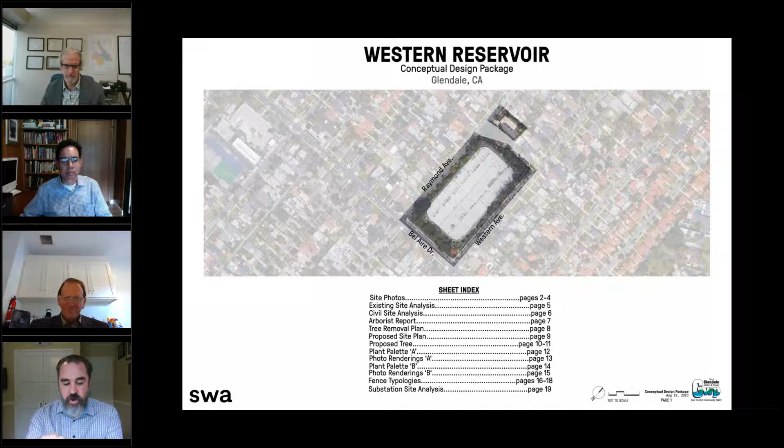So for a quick rundown of the site, we don't necessarily have to spend a lot of time on these site photos—most people are very familiar with it. But you'll notice there's rewilding landscape, as Michael mentioned. When the irrigation was cut off, the landscape went to seed, and it's become a densely overgrown hillside. We all know the chain link fence is not in very good shape. We're looking at different photos of the landscape overgrowing, plant debris—you can see what the hillside looks like. So that's really what we're coming in to renovate, everything you see on this hillside.

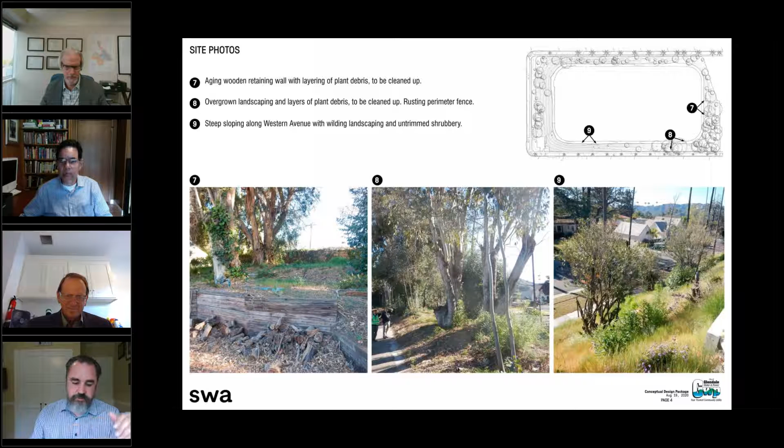As we came on board as landscape architects, we started doing a site analysis. We looked at the existing retaining walls, the access road, the lifeless streetscape planting, the chain link perimeter fencing, and we started looking at what areas were most in need of renovation, removal, or refurbishment. There were also a lot of interesting heritage large trees on the site, which lends into our arborist report and analysis that you'll see in a bit.

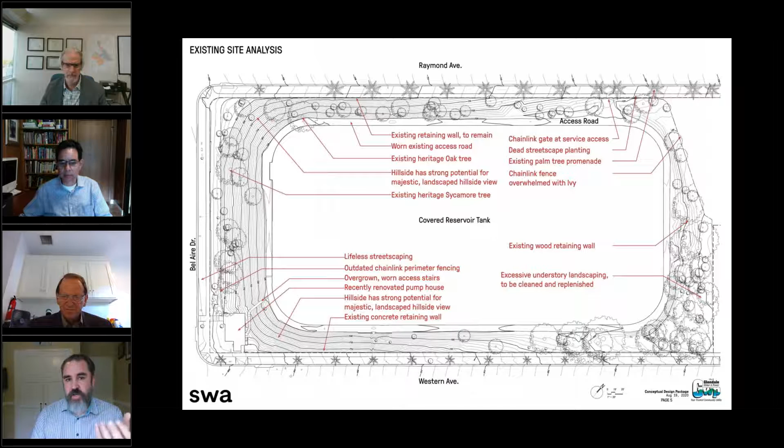Not only did we as landscape architects look through the site, we also brought our civil engineers on board. They started looking at slope retaining, the condition of the roadway, the condition of retaining walls, and the condition of the large trees and roots affecting certain areas. Of course, with the heritage oaks, we want to make sure we maintain those as best we can. So it's really all hands on deck, wanting to make sure this is not just going to be a blow-and-go change of the landscape, but something that's able to last for quite some time.

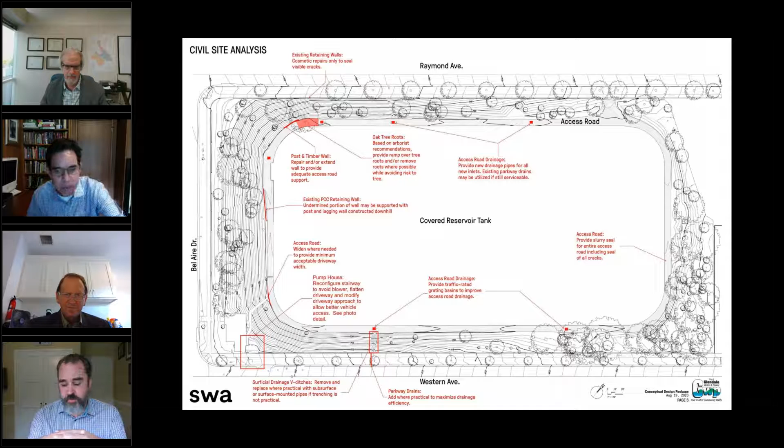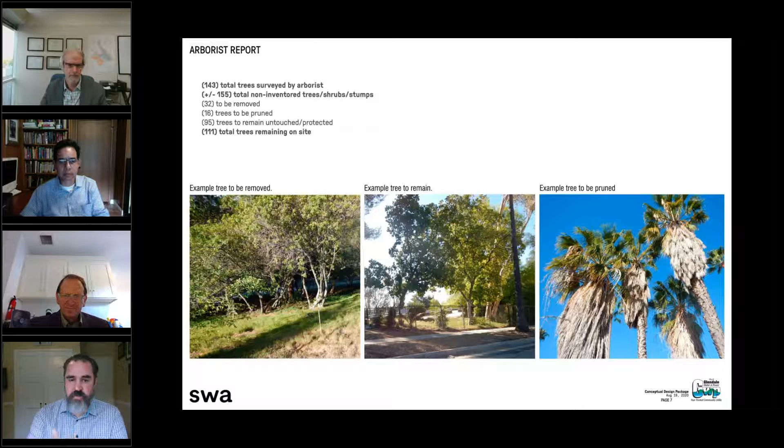To that note, we also brought in arborists, who spent a few days out there in April of this year. They surveyed over 143 trees, and there were around 155 non-inventory trees, shrubs, or stumps—smaller species that are most likely going to be removed, especially the stumps, or at least ground down. Of those 143 trees, we looked at example trees to be removed, trees we'd like to remain, and trees we'd like to be pruned. Coming through that, there were only 32 trees that we really felt were not in good health or should most likely be removed for design, aesthetic, health, and vigor reasons, while 111 of those trees would remain on site. Now, of course, you're going to ask me, what does that look like?

There's a large massing of trees on the northern edge, and sporadically different trees elsewhere. Walking the site with the arborist and Gerald, we realized it's really an eclectic menagerie of different species. Part of what we're looking at is that some species being removed are either non-native or invasive, as well as species that are overgrown or unhealthy and non-vigorous.

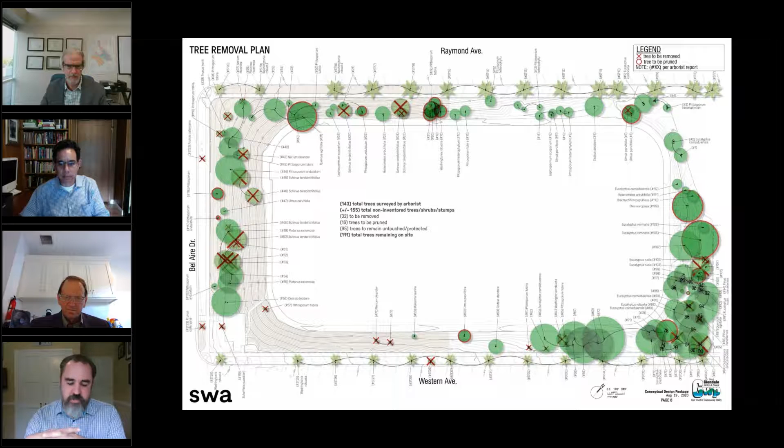We're looking for native and adaptive species that are water-wise and will adapt well. There will be irrigation systems installed, but for this type of planting, that's more of an establishment system and for periods of extreme drought. So what we're creating is an upper story of native and adaptive trees, looking at both flowering and deciduous trees as well as evergreen trees.

Species-wise, the flowering and deciduous trees we're looking at using include the California walnut, California sycamore, Western redbud, Chilopsis linearis (desert willow), as well as madrone and buckeye. These all give nice, brilliant pops of color throughout the year, and change with the seasons—everyone knows what a sycamore looks like when it turns. It's one of the pleasures of finding trees in Southern California that show the change of seasons, and that's what we're aiming for with this palette, besides being native and adaptive.

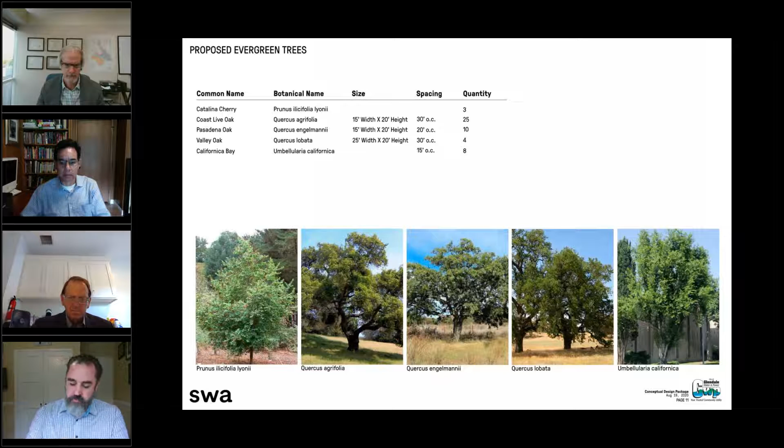The first of these two is the California hillside, hearkening towards thriving plant communities found in the local hills. We have brittlebush, California holly, deergrass, buckthorn, as well as some sages. There may be some additional plants added to this mix, but what we're looking at here is the overall theme and general idea of what it would look like—hearkening towards the thriving plant communities of the local hills.

So this is our California hillside option. As Gerald mentioned, if you have any questions throughout this, we have someone monitoring the chat—please feel free to post those and we'll address them at the end.

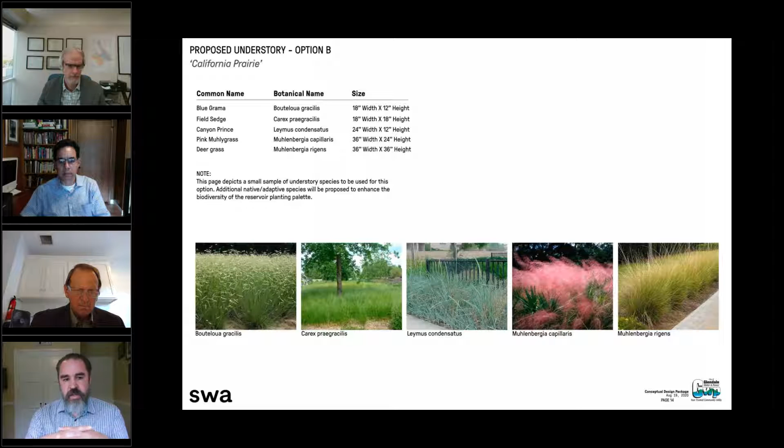Our second option is the California prairie. This is more a palette mixed of grasses that will thrive in a free-flowing, more open-space aesthetic. The rendering of that would look much more like this.

As you can see, the overstory plants and trees we're intending would be basically the same, as those are really the bones of this landscape renovation. And this understory is going to give quite much of the character to it.

So whether it's the California hillside or the California prairie, we know that this is what you're going to see from your front yards. We're really looking at increasing the curb appeal, not just of the reservoir itself, but of the neighboring streets of Raymond, Western, and Bel Aire. So we look forward to your thoughts and comments on these palettes.

The next series of options that we're presenting to the public is the fence that is going around the property, and that's what you see here. As was mentioned, we are removing the chain link fence, and you'll be looking at roughly 1,620 linear feet of new steel metal picket fence that'll be going in.

The first of three options we have to present today is a 3-rail commercial style classic. As you can see, what they mean by 3-rail is there's a bottom rail along with 2 top rails through the picket. That is our option A.

Our option B is a 2-rail, more industrial style metal picket fence. As you can see here, there's a single rail at the top and a single rail at the bottom, as opposed to 2 rails at the top.

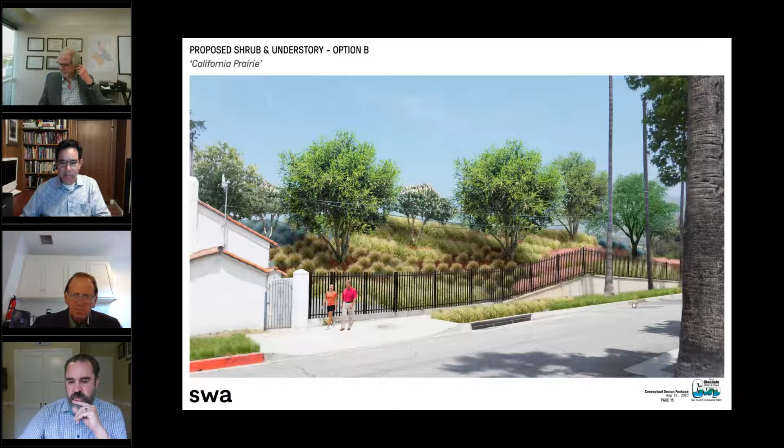Carmen, that's an excellent question, and I know my presentation went rather quickly as well, but we will be including, in between the sidewalk and the curb, which is considered the parkway area, and that area will be re-landscaped. I can actually go back up to part of this presentation where we're showing the proposed tree plan. So the median planting will also be, whatever planting that we're utilizing in the understory, that will be coming up in the medians.

And we're also proposing new trees, on Raymond Avenue in between the palm trees, to blend with what's already existing there, with oak trees in between the palms. So I hope that helps. We are also adding new trees along Bel Aire Drive in this parkway as well.

So Jeremy, there is a difference in the parkway planting between the two options. Do they match the understory for that option? Correct. The parkway will match the understory option, whichever one, whether it's the hillside or the prairie, the parkway will match with that. It'll be drawn from the same palette.

A follow-up question, since we're on the parkways, this one comes from Alex. I support tree planting in the parkway 100%. In order to be more climate resilient, we need to maximize shade in our public right-of-way. Question is, are the proposed parkway trees tall shade trees or smaller trees? This is a very popular neighborhood for walking. We should maximize shade as much as possible. Along those lines, why are there no shade trees installed on the western side of the reservoir?

That may be a question for the urban forester and how the plans were done. As of right now, the western side is staying with palm trees alone because it matches what is going on the rest of Western, maintaining that aesthetic through the whole street. On the Raymond side, we've added oak trees because oak trees have been added along Raymond as well, maintaining that aesthetic, and those are shade trees. The trees along Bel Aire are also some flowering and some shade, so there's a mix there. So we're somewhat bound by what is being set up around us and what the adjacencies are.

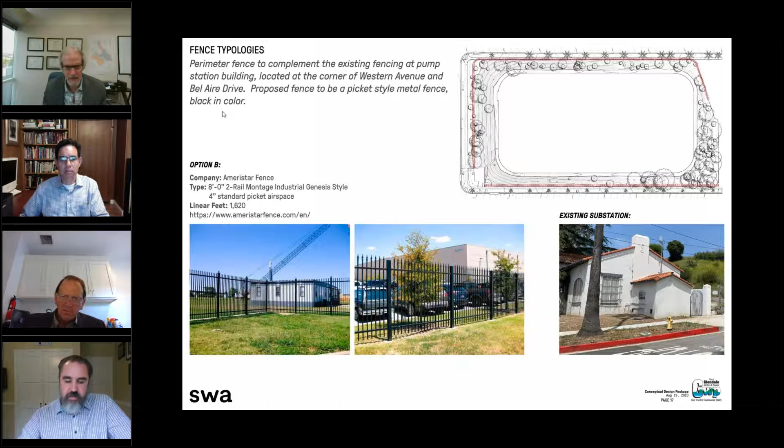I think we kind of knew this question was coming, and that is definitely an interesting comment on that. It looks like Army Barracks, and we understand.

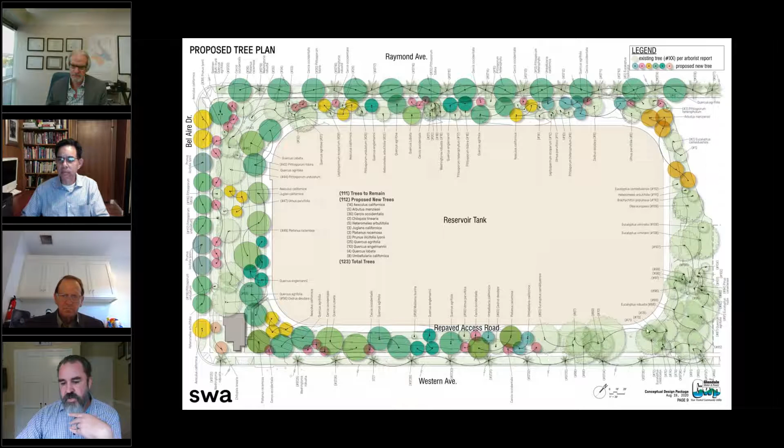The beautiful thing with the plan we're looking at is that not only does the understory offer a visual break, which is brand new and very visual, there's also the overstory with all the trees coming in. We're planting new and additional tree species and understory, which should end up blocking or screening the majority of that view.

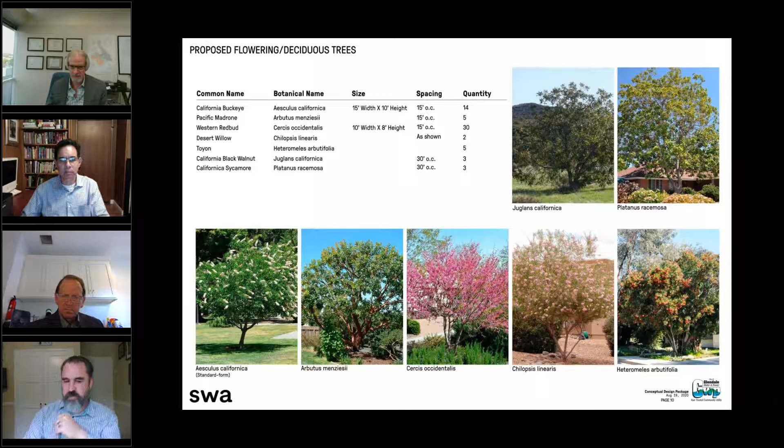Long story short, once the new planting comes in, we are very confident that you won't see it anymore. At least that won't be what draws your attention. That's for sure.

Jeremy, how long will it take for the planting and the trees to mature so it can cover up or provide coverage so they can't see the reservoir, at least from Raymond's side?

A lot of the trees going in on the hillside slopes through this area will probably be in 24 or 36-inch boxes. We'll probably be able to put in some larger ones along the back of the Raymond side because it's a little bit more flat through there, and that's definitely something that can be considered.

You'll get instant coverage from the decent sized trees. As for the landscape growing in, within one season most of these plants will have reached near their maturity, depending on what size we put them in at. We'd be wanting to put in mostly 5-gallon sizes for a project like this, something that can adapt and blend in right away. Again, it's all going to come back on pricing and cost, but that's what we're looking at.

The next question comes from Holly, who says, this is very exciting. Any chance we could have some seating options like benches along Bel Aire?

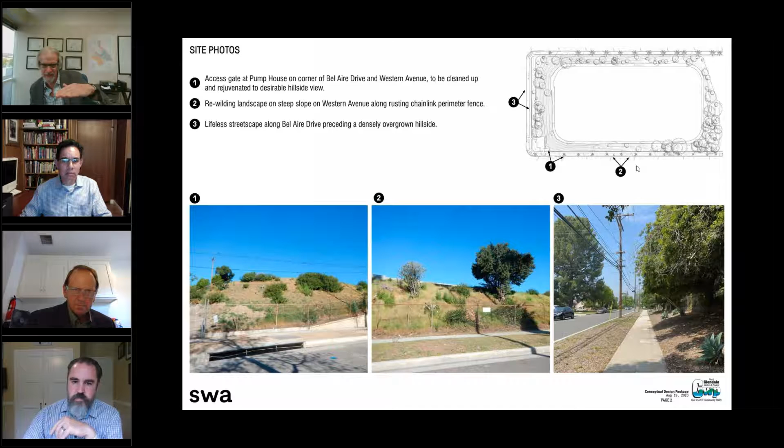We wouldn't want to modify the earth or the soil there because it's really part of the structure of the reservoir. If it helps, think about it like a roof, but really even the water inside is perfectly flat, because water is perfectly flat since gravity holds it flat. So if you were standing there, the road's at an angle and the water's flat. We wouldn't want to do any sort of structural modification to any of that. I hope that answers the question.

So yeah, I guess the answer is no, because structurally it might compromise the structural integrity of the reservoir. So we cannot alter it.

And that leads to one of the questions regarding bioswales around the reservoir site. Michael, do you want to tackle that as well? It's kind of related to what you just said.

A lot of times bioswales and green streets are another name where you try and collect runoff and have it percolate in. This is actually a place, because of how it's built structurally with earth and fill, where it's kind of the opposite. We want the water, especially the water on that whole roof area, to go away. We wouldn't want it to undermine the structure of that reservoir, and having something like a bioswale where water is concentrated soaking in there could undermine that. So this is actually one place where you wouldn't want to do that.

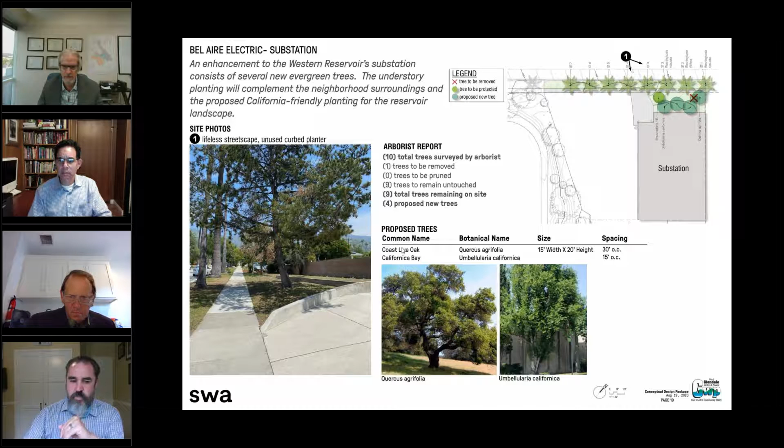The next question comes from Joe: Is there a way to hide the 5-foot cinder block wall on the south side? It faces the Boy Scout house from the substation, the sections closest to Raymond Ave. The answer is yes, and you can see what we're looking at here with the California Bay Laurel. We are planning on planting 3 of those in front of the cinder block wall, as well as a new oak tree, so we are planning on screening the cinder block wall.

This question, I believe, was also just addressed with the bioswales, but there is a lot of rainwater runoff that comes down Western Ave during our rainy season. It brings a lot of water that could be captured somehow if incorporated into the design. Has this been discussed? This past year, there was a lot of sand and silt that would collect at the Bel Aire and Western intersection. This question comes from Holly.

Any others? Yeah, and just back to what I was saying, we wouldn't want to collect that near the reservoir because of the way it's built structurally. But I know the public works folks who manage the storm drains and streets have a really good idea of where there are areas with issues, and they've been working on projects and plans to help alleviate some of that. Of course, it may not just be that intersection. I think they have a pretty big map of places with issues that they're working on projects to help alleviate, but it's not part of our landscaping project.

This next question is regarding tree selection, from Ralph: When the city replaced the carob trees with oak, they traded one problem for another. The oak sheds acorns that create safety hazards as well as troublesome debris. Please consider this when selecting trees.

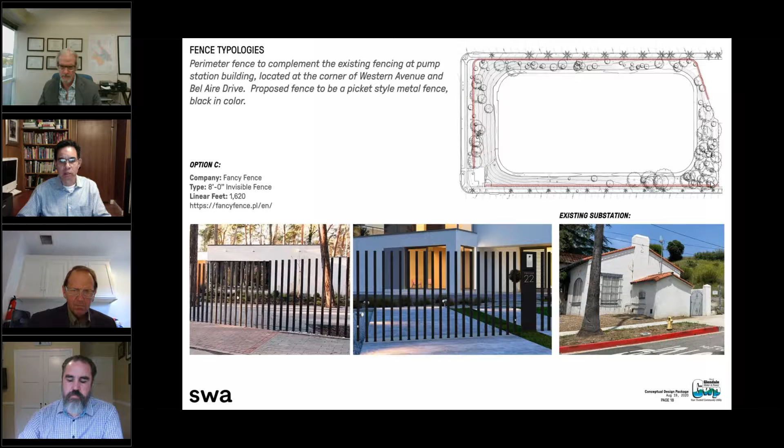I wanted to add that on the north end, there's a portion of the north boundary of the reservoir site that we're going to just keep as chain link, because it's not really visible, so we're trying to save costs on the project. We're going to definitely put the tubular steel fence where it's visible from the public right of way, but in areas where it's not visible, we'll keep as much as we can — the fence was actually in good condition, but we'll look at it and make sure — on that north end, to make sure we spend the ratepayers' money appropriately.

Some last comments trickling in. I was just going to say, being a landscape architect, you go through lots of these projects, and we've dealt with lots of cities over time, and the plain simple fact that GWP is actually reaching out and looking for comments and responses from the neighborhood — it's really heartening to see a public entity that really wants to improve and work on this project. SWA is very proud to be part of this process, so we're really excited about this project. It's not every day that something like this gets the care and attention that it deserves.

So I definitely thank Michael and Gerald and Richard for getting that going. And I did hear, Ryan, you had one more question?

Oh, just being the voice of the attendees here, I just wanted to share the best wishes from them. Linda says I think it looks beautiful, I've lived here 57 years and have seen the changes, can't wait. Joe says thanks for all the answers to the questions. Alex says thank you, wonderful presentation, and I support your conservation and climate resilient efforts. Great work, thank you. It's, like I was just saying, a pleasure to be a part of this process.